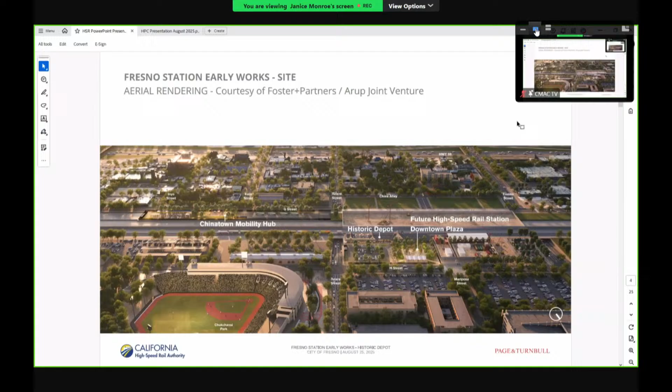Just to the south of that, south of Tulare Street and between Kern and Inyo, is where the improvements on the Chinatown mobility hub exist.

So there's 4 bus bays between Tulare and Kern that will have electrical bus charging. This is intended to accommodate regional buses like the Fresno County Rural Transit Agency, as well as other future buses that may come here from Clovis or Kings County, or even the YARTS buses that connect to Yosemite.

The mobility hub in the middle is where you might find bike parking, electric bike and electric scooter charging facilities. I know there's not a lot of bike share and scooter share in Fresno today, but we imagine it in the future will be an integral part of the transportation network.

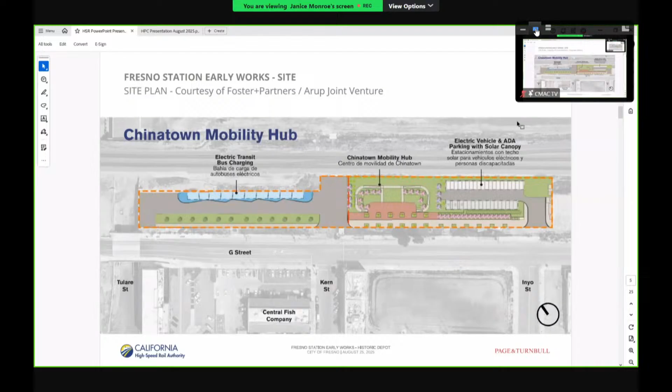As people come and go to the Fresno station, high-speed rail station, they'll be able to connect not only to buses but also to bikes and to scooters. Part of this project includes this parking lot in Chinatown that will have electrical vehicle charging and photovoltaics.

This is a look at the plaza in the downtown. In front of the historic depot, you can see about half of the site will be landscaped with trees and other native plants, as well as some paved surfaces for parking and for community gathering.

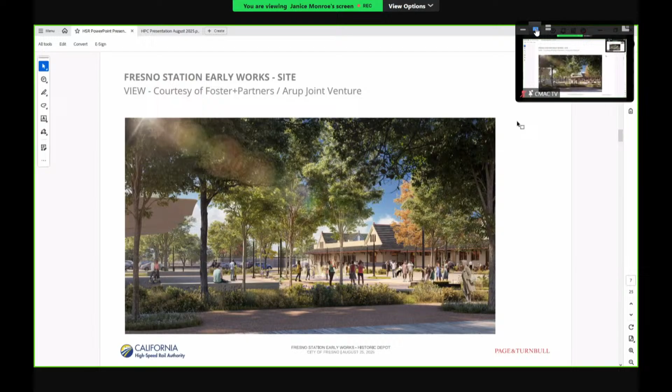This is a rendering of that space that you could imagine standing somewhere near Mariposa and H Street, looking towards the Tulare Street side of the historic depot, and trees and public space, as well as some parking on that side.

These are some of the components of the project. The activation is expected to include these enhancements for space adjacent to the historic depot, that landscaping and shade and features that have been depicted in the renderings.

We hope to restore and reinforce community connectivity with the transportation aspect of the project, as well as many other improvements that may not be part of this project, but the High-Speed Rail Authority has been working on street improvements, including Tulare Street, which was recently opened at the end of July, connecting downtown and Chinatown.

We also have shade structures, tree canopies, stormwater management, and that electrical vehicle parking that I mentioned.

I'll invite Melissa to come up and join me now to talk through some of the historic depot renovations and what her team has been working on to design and consider the next steps for the historic building.

Thanks, Ben. That's working. So, perfect. Good evening, Commissioners.

Melissa Goodrow, Page and Turnbull, working on behalf of a very large team of consultants and advisors, and pleased to be here this evening.

Our goals for the historic depot renovation are primarily seismic retrofit to bring it up to code for full occupancy. That includes also providing accessibility upgrades so that we are fully compliant and can reoccupy the historic depot.

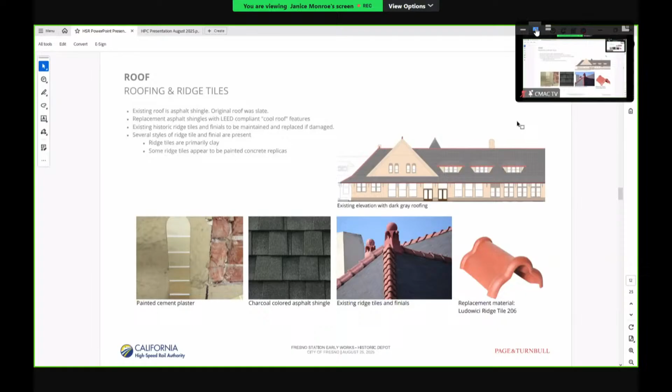Windows and doors rehabilitated as well. On the interior, some ADA improvements with access both into the building and through the space. We've got the new stair and elevator in what we call the lobby area, the main waiting room cleared of non-historic fabric, and then new restrooms just off the main waiting room.

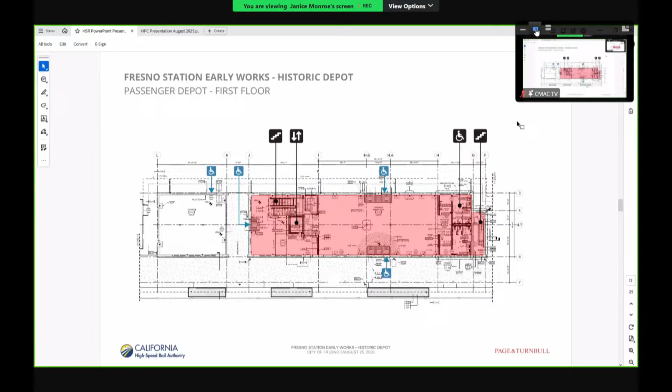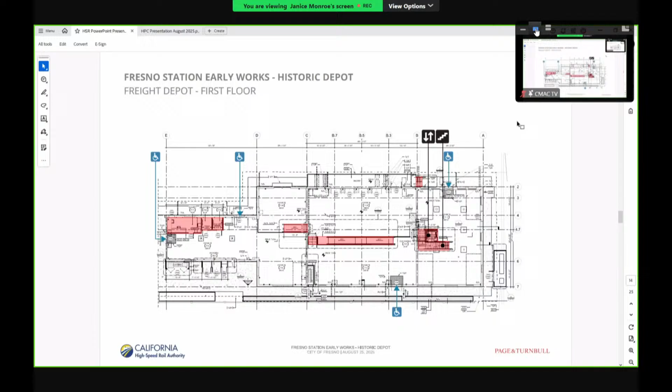In the freight depot, it's primarily just access - new compliant ramps to get up to the raised level within the freight depot, and then a new elevator and stair to the second floor space that's fully compliant. We also have, on the left, the security office and some electrical rooms that are going in. But other than that, the space will be open and in warm shell condition.

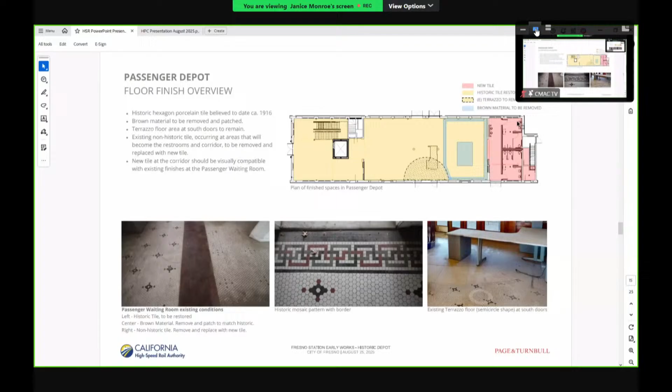Here's just some slides of some of the finishes in the former waiting room. And we have found that we're able to replicate the mosaic tile. We found a source that can come very, very close to both the color, size, and configuration of all of the mosaic tile. So lots of patching and repair, but that'll be restored.

Wood trim, we'll do some infill where some of the wood trim is missing, and repair the trim and the finish. And then the Tennessee marble will also be sourced and restored in areas where it's missing.

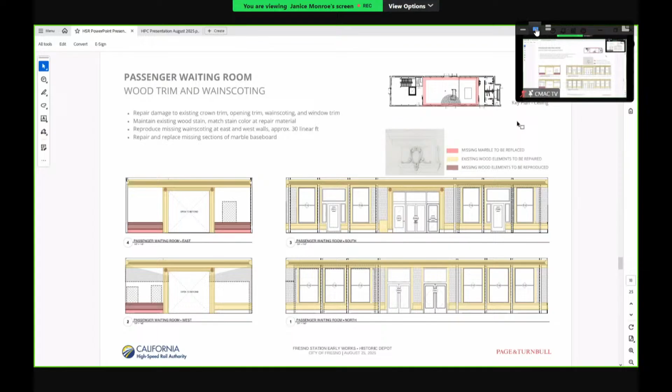For ceilings, we're hoping to keep the surround intact while we remove the middle portion of the plaster ceiling that's been modified over time, in order to get steel strengthening members for the floor above in there. But at the very least, if we do have to remove the detail, we're going to salvage all this carved wood and restore it to its original condition.

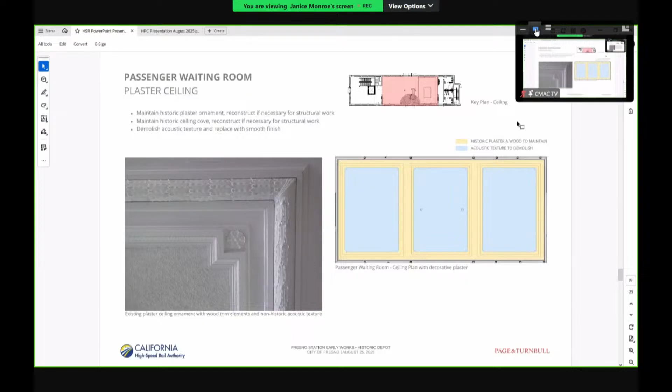And then new public restrooms. This is an area of the building where the 1916 mosaic tile does not currently exist—there's a modern tile in this space. So we're going to go back with a different tile, something compatible with the historic building, and compliant fixtures.

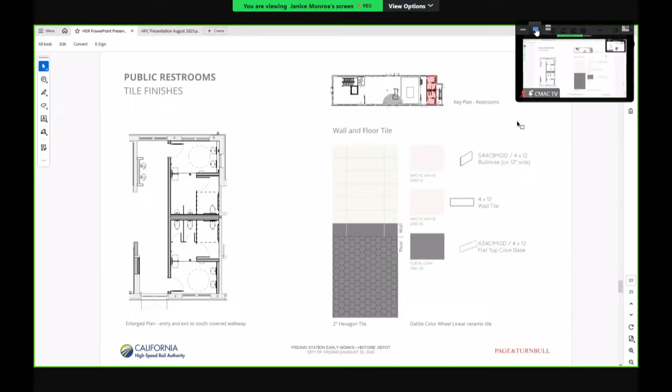This area will have access to the covered walk to the south, and if there's an event going on either in the former waiting room or the plaza, there will be some restrooms available to use at the building.

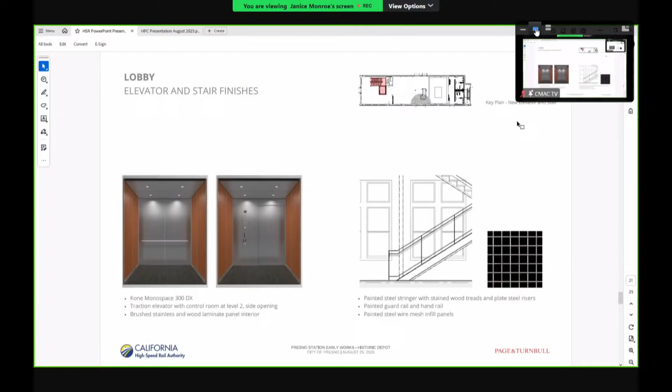Just some images of the new elevators, and a new custom steel stair going in at the lobby area. And that's pretty much it for the historic rehabilitation.

I don't know if we have our environmental team on the phone, but if we do, we can have them cover some of the coordination work we've done in the last year or so with the State Historic Preservation Office, and the documentation to support this project and the concurrence from SHPO. Amy McKinnon is state staff with the High Speed Rail Authority.

Amy, if you want to speak to our coordination work—let me see if I can advance. It's not letting me advance the slide, but I think we have one or two slides that discuss the State Historic Preservation coordination. Can you hear me okay? Yeah, we can hear you.

So we did receive concurrence on the proposed design from SHPO's office, both on the finding of effect under Section 106 and a Section 5024 report that described the proposed work. And there we go, as you can see on the slide.

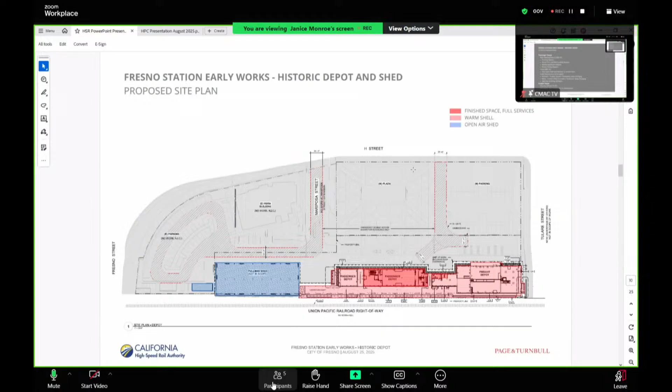That's backwards, I'm going forward. It's not letting me do it. Couple more? Yeah. It's got the actual north elevation and south elevation. There it is, yep.

So what is warm shell and what is original station? I'm just trying to get a sense of the scope of the change. I wish I had a pointer. It's just the red part. Yeah, there's a pointer but it doesn't work on the screen.

The tallest gable peak highlights the area of the oldest part of the station, and that is indeed where the entry is, those two double doors above 1C, the entry into the former waiting room. On the ground floor that will be fully finished, fully serviced space. The second floor is warm shell throughout, with no finish.

Can you explain warm shell? Essentially, we'll do the seismic improvements throughout the building, and the basic accessibility path of travel throughout the building, but the space will be raw. There will be VRV conditioning units on site that will serve those spaces eventually, but they are not actually fed into the space at this time.

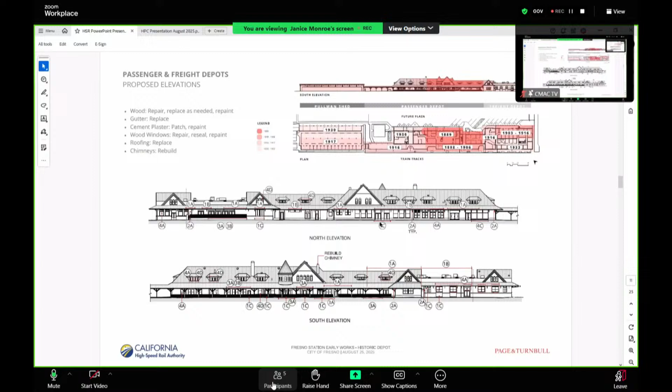I just wanted to say congratulations on your Section 106 concurrence without comment. That really shows your comprehensive and sensitive effort to rehabilitate and expand this facility. Thank you.

All right, anybody else? Okay. I do have a quick question to follow up on the parking comment—you said you're going to install stalls near the front of the depot, is that correct? Yeah, do you want to bring up the site plan again?

Is there going to be a break between the plaza you're proposing and the depot, or will it essentially be blocked—plaza, then parking lot, then depot? I can show you the slide. It doesn't go back... yep, I got it. We have a slide that shows it.

This one—you can see the historic depot has this promenade sidewalk with the purple and lavender trees. I think it's about a 20 to 30 foot buffer between the building and the parking lot, so they'll be running side by side. From the historic depot to H Street is about a 2-acre site: about an acre of landscaping and hardscaping on the downtown plaza, and approximately an acre, a little less, of parking lot at the corner of Tulare and H Street.

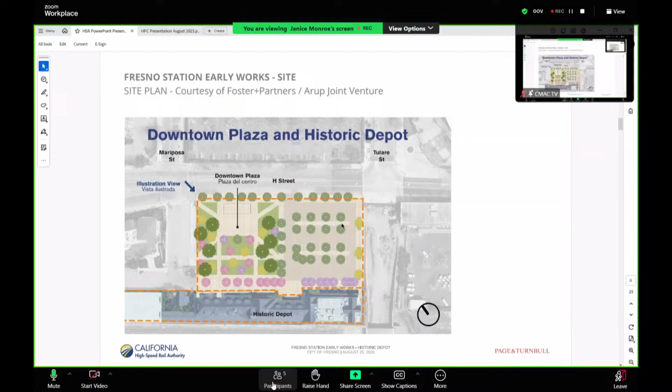What's the scope of what you're looking at for the seismic retrofit? How are you going to retrofit and stabilize the building? I ask this because we had a similar building with the old administration building at Fresno City College, where they did work that involved archways and things like that in order to maintain the archways and the actual visual of them with the retrofit. So I'm curious as to how your retrofit's going to look.

Just the coring of the brick and pouring cement. The whole roof comes off. Rutherford + Chekene are our structural engineer, they have a lot of experience with historic buildings, and essentially there's a diaphragm at the roof, enhanced framing to bring the loads down to the floor level. At the floor level, a combination of diaphragm and some steel framing.

We needed some steel, especially in the area above the main waiting room, just to capture the loads and make sure we get the strengthening within the height that we had available to us. Then a steel perimeter member is going to be used to tie masonry walls to the floor diaphragm. We have what we call steel strongbacks that are going to go on the interior side of the brick masonry wall to hold the masonry, and those will receive new spot spread footings.

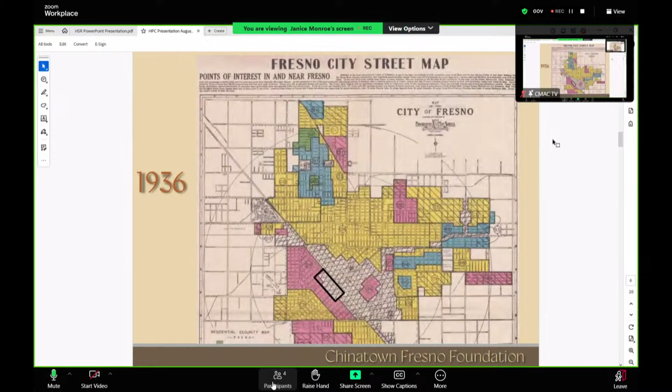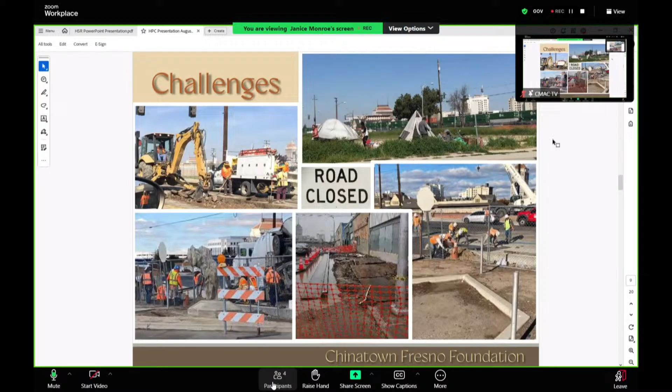But they don't coordinate with high-speed rail. They don't coordinate with the E Street resurfacing. They don't coordinate with high-speed rail, transformative climate communities - all the projects are done separately. So when they close a street, then the next day somebody else closes that street, and then the next day somebody else closes that street. It can get really frustrating to drive into and around Chinatown.

But we still are very excited working with high-speed rail. Tulare Street's open - you can drive into Chinatown in the underpass on Tulare Street. It's marvelous. So things will get better.

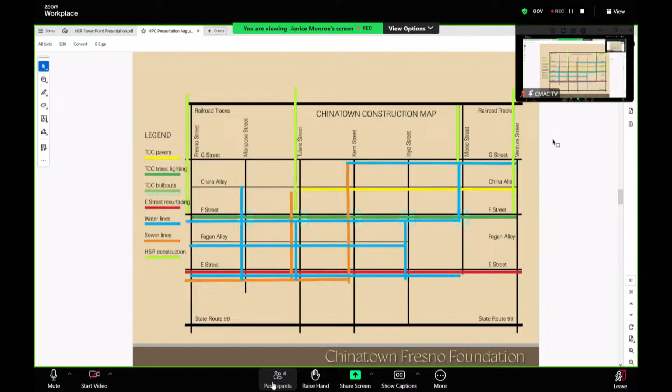I am talking to High Speed Rail about a couple of things. One is that there be a walkthrough in the station, open 24/7, so that there is walkability, because the underpasses aren't conducive to walking, unfortunately. We're looking at some other ideas about that.

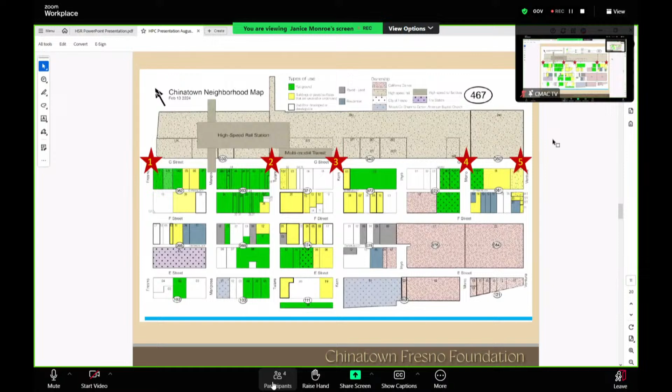The other thing I want to encourage high-speed rail with - you can see between 3 and, well, just to the right of 3 is where the Chinatown Mobility Center is. And I would just love to have a little creek in that place, a recycling creek. Wouldn't that be nice? A nice park, recharge your car, dabble your feet in the water. I think that's a good use of that space.

So the Chinatown Fresno Foundation came about because of transformative climate communities. Community stakeholders met in order to have projects within transformative climate communities. There was no organization in Chinatown at the time, so they met for that. They talked about construction and construction mitigation, and they decided to form the Chinatown Fresno Foundation. So the foundation was formed to create a united voice in Chinatown in 2018.

Our mission is this: unite, honor, strengthen, and build. We unite our community, we honor our heritage, we strengthen our business and property assets, and we build vibrancy in the neighborhood.

We do that through 3 initiatives. One is cultural heritage - we have a number of projects, including presentations like this that give you Chinatown history. We have just opened a cultural heritage center, which will launch regular hours in September. We have self-guided mural tours, historic building tours we give, a number of things related to heritage and cultural heritage.

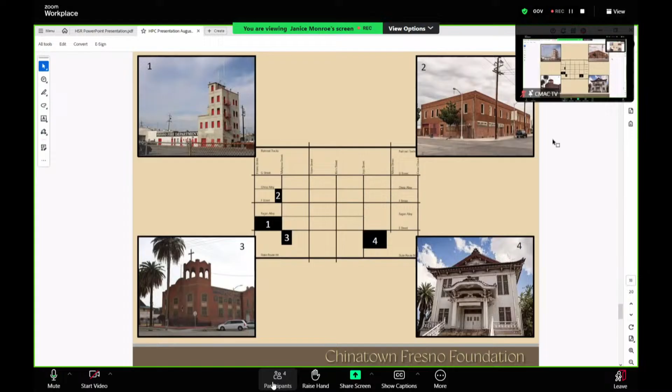And the Azteca Theater is actually on the National Register, and it's the only building in Chinatown that is.

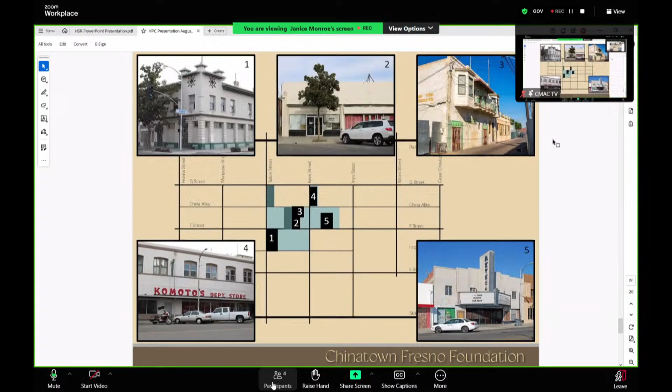When you were talking about the Japanese businesses that were stopped basically in 1940 for the war, how many were replaced after the war? How many came back?

We don't have a good count of that. We actually have pretty good history all along until about the 20s or 30s. We have some great maps, we just got the originals of maps that listed all the businesses in Chinatown, hand-drawn. It's absolutely beautiful. We had a copy, but now the originals have been donated, so we're very excited about that. We can tell you up to 1940, but not after that.